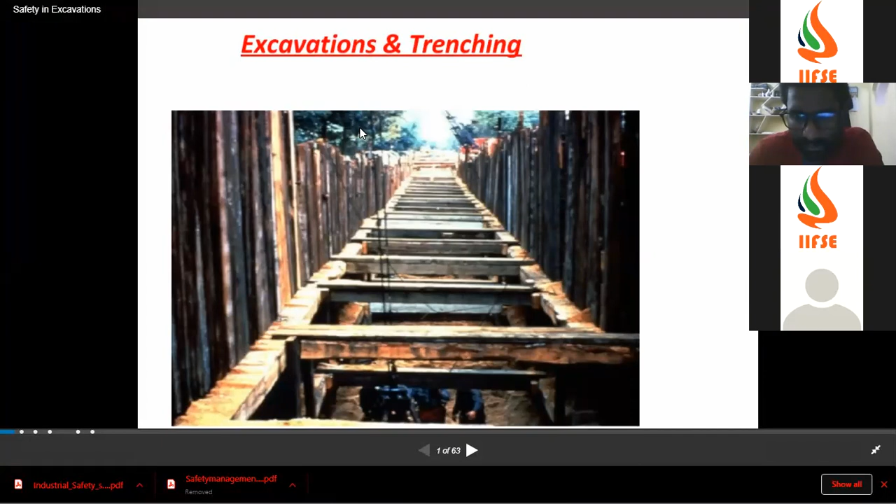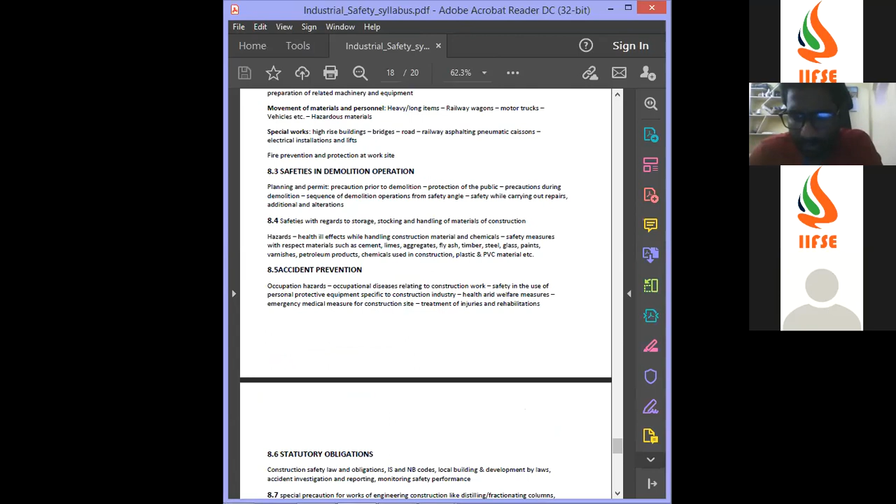The syllabus map. Is the syllabus paper visible? You can see the syllabus paper, right? Everyone? This is the syllabus. Yes, sir, it is visible.

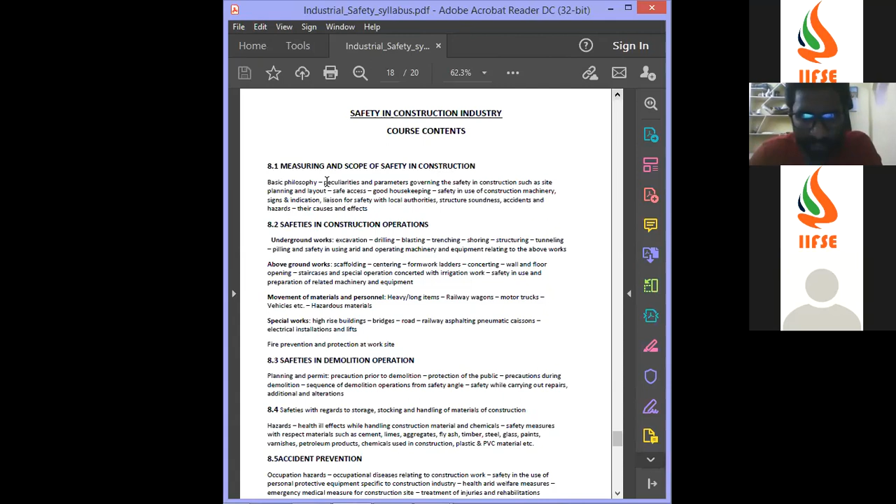So here we have measuring scope and safety in construction, basic philosophy, peculiarities and parameters governing safety in construction site, and safe access, housekeeping. These are the measuring and scope of this, which is the introduction part actually.

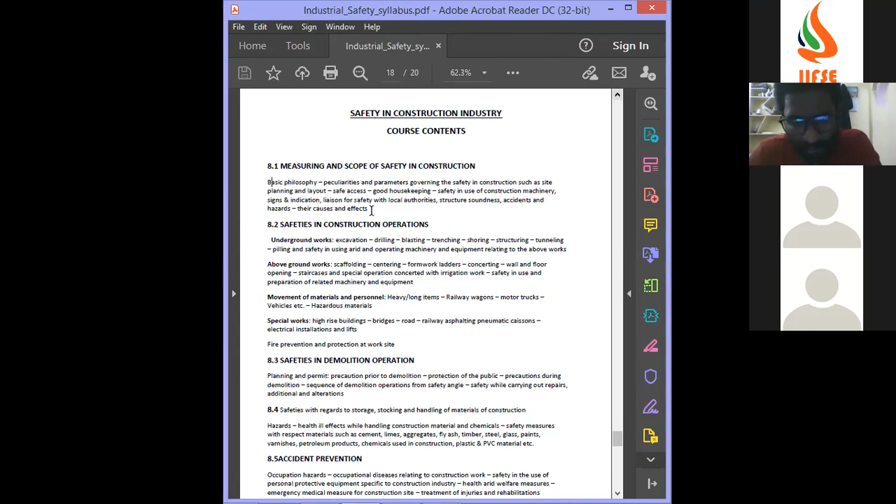From here the core concepts get started. Safety in construction operations. Underground work - what do you mean by underground work? Excavation, drilling, blasting, trenching, shoring, structuring - everything comes under underground work.

Normally here, for your information, I would like to add a few points. There is underground work, above ground work. Actually, there are two other more construction safety related works, which is above water and underwater. This is underground and above ground, and we also have construction safety above water and underwater.

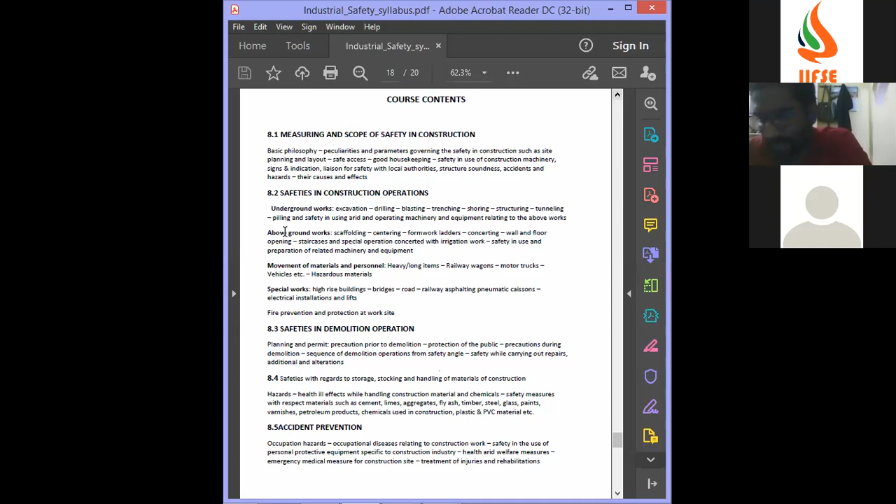If you read the Regional Labor Institute or Central Labor Institute books, I remember reading many years back that they mention underwater and above water works also. All these also come under construction - above water construction, underwater construction.

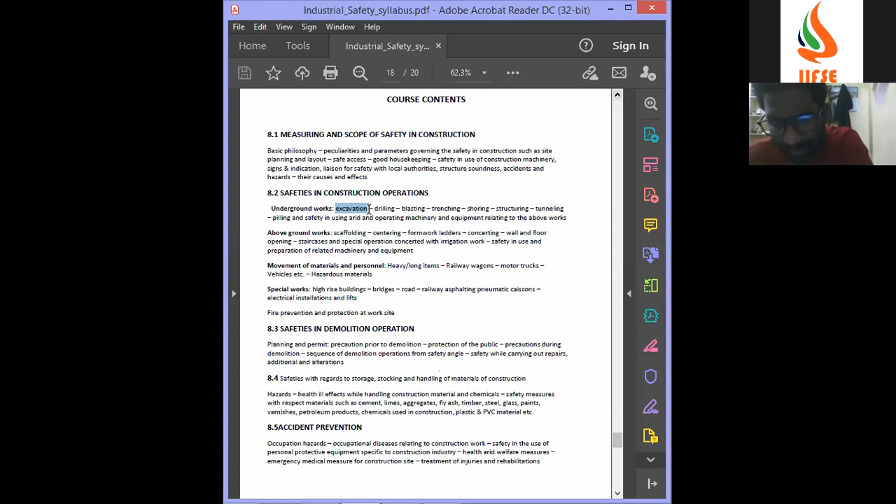Coming to above ground construction - scaffolding, centering, formwork, ladders - we'll discuss what are the above ground constructions. For everything we'll have hazards, consequences, and control measures. Your main principle is to understand what is the hazard in excavation, what are the control measures - you have to relate it that way. Today we'll go to discuss all this.

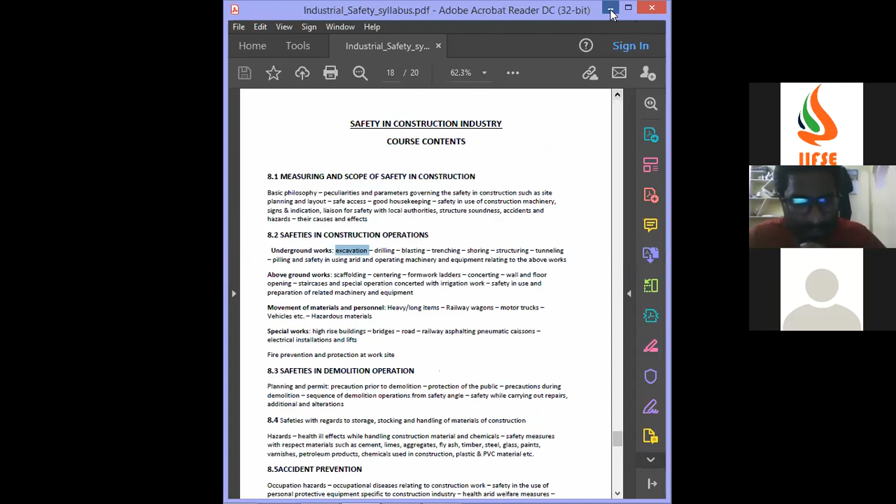So now you can able to see the excavation and trenching slide, can you see? No sir... just wait... now we can see, right? Now it's okay, right?

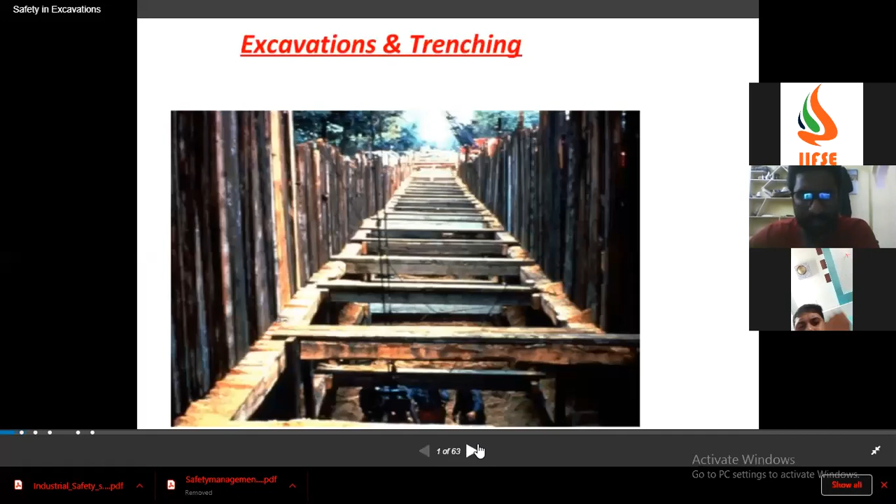So here, excavation and trenching. I would like to go in a very systematic way. No need to rush, because this is the 108 paper. Today's class covers most of the topics.

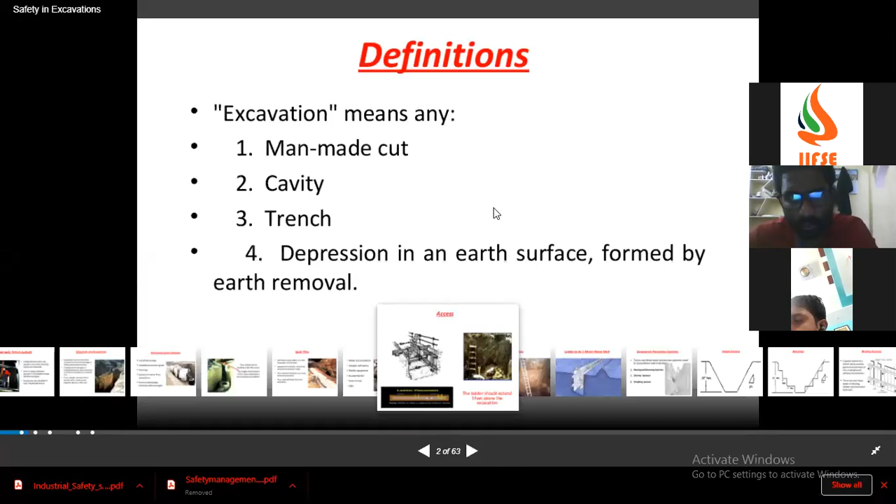Coming to the definitions - excavation means any man-made cut, cavity, trench, or depression in an earth surface formed by earth removal. Man-made cut, cavity means a small gap, trench can be 2 feet, 3 feet, or any depression on an earth surface formed by earth removal.

Normally they say that if an excavation is more than 3 feet or 1 meter in depth, only that comes under excavation. But the word itself says any depression in an earth surface - like if we do a small digging with our hand, it also comes under excavation.

Coming to industrial practice, excavation can happen with excavators, bulldozers, foundation digging equipment, or poclains - different machines which do the excavation. So basic definition is excavation means any man-made cut, cavity, trench, or depression in an earth surface formed by earth removal.

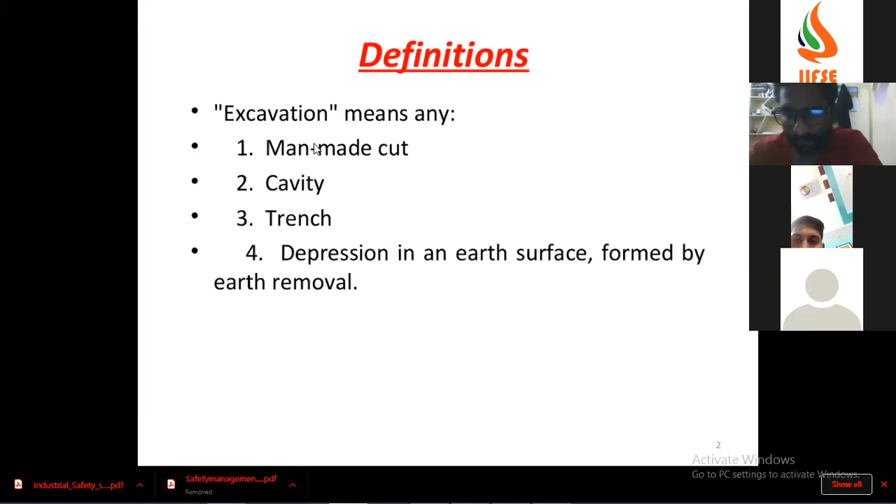Okay, so this is the basic concept of confined space. Why has confined space come up here? Because it is a part of construction safety, and in construction safety a lot of confined space work will be going on. So what do you mean by confined space?

Confined space is a space that by design has limited opening for entry and exit. Limited opening means it will be very small, it cannot be large. There is only one exit and one entry, one opening.

Fine. And we cannot just conclude it in that way. It depends - if it's a boiler or a tanker, it's different.

For example, our trailer petroleum tanks, petroleum boilers, or in oil and gas you'll have different kinds of tanks. Sometimes the same entry is the same exit. Okay, that is also confined space.

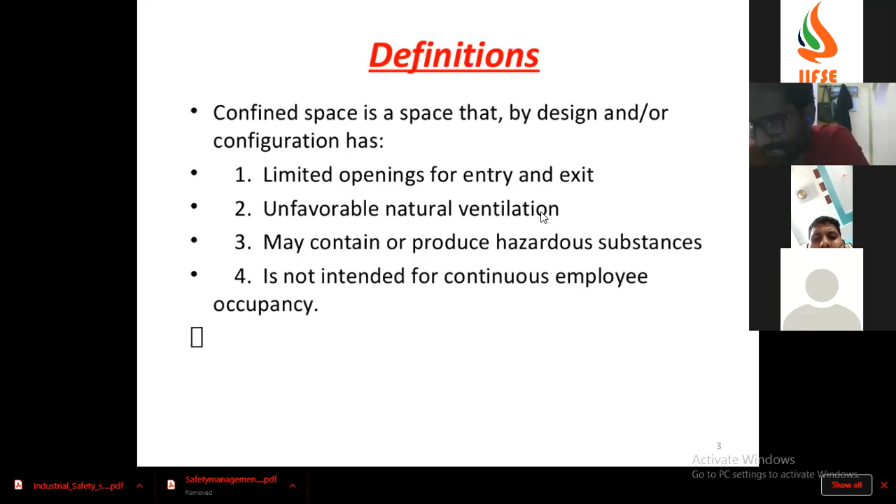Okay, so occupancy means no one should go and occupy that area - like we should not go stand, have a chat, or have a conversation. This should not happen in confined spaces.

So if anyone asks you in an interview, people who are new to the topic, what will you say - confined space is a space that has limited opening for entry and exit, no natural ventilation, gases are present, chances of hazard are there. Okay, so coming to objectives.

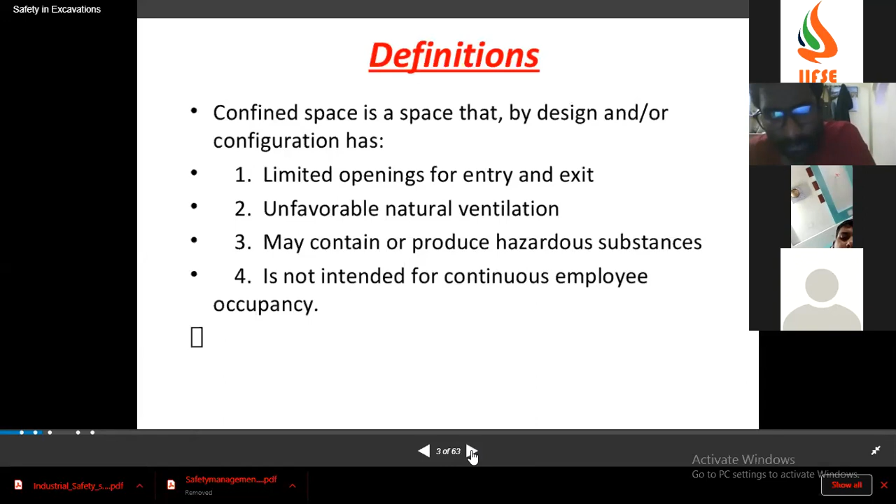Sir, in this confined space there are a lot of requirements - are there mandatory requirements? Actually these come under precautionary measures. Do you know about H2S inside the tanks and vessels?

Before going into confined space measures - yes sir, please tell me sir. Hello, can you hear me? Sir, there is some toxic gas in there. Sir, we are not able to hear your voice, your voice is getting broken. Sir, the server is very low, that's why.

No problem. Actually what you have asked is, before going into the confined space, based on the precautionary measures, the first thing to do is have a multi-gas detector and test the gases. Okay, that is the first primary thing to do, and we will talk about this when we discuss the precautionary measures.

What are the hazards in confined space, sir? Every confined space crew must be trained properly about confined space. Sir, we are not able to hear your voice. I'll continue the class, we'll discuss this.

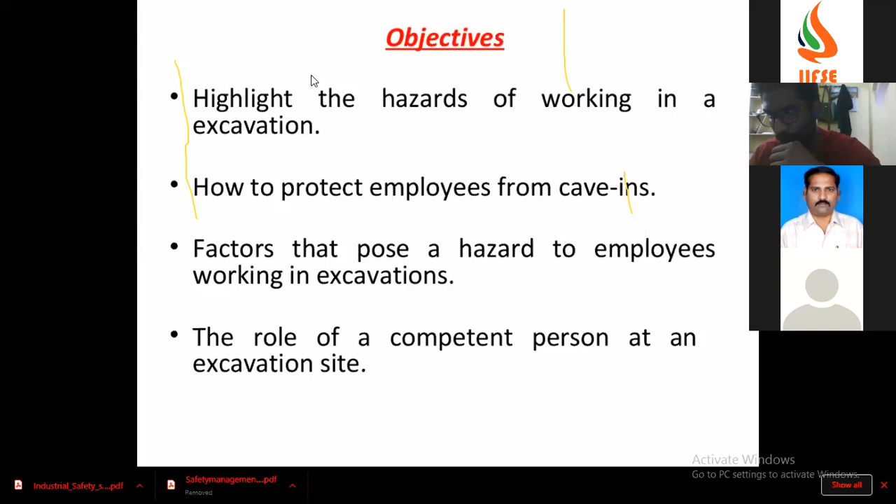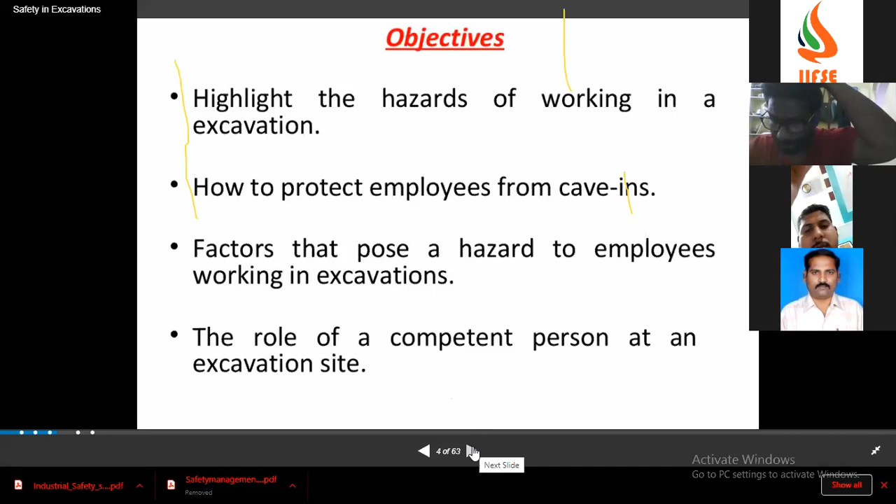We have to see, first, the employee must determine the estimated locations of utility installations. What do you mean by utilities? Like sewers, electrical cables, water lines, gas pipelines - all come under utility.

Telephone lines too. We have scenarios where gas pipelines got ruptured due to excavation because of improper clearances. If excavation work is going on, as a safety officer the first thing you'll ask is whether there is anything going underneath. For example, if you want to drill a hole on a wall in an industry or factory, you'll first ask whether there are any power lines running inside the wall. That is a basic thing one should ask.

We will done, sir, electrical survey, underground survey. Yes, underground survey should be done.

The yard layout should be asked from the government. I think someone is drawing lines. I don't want that to happen, please. Someone is drawing lines, I don't know why the lines are coming on my laptop.

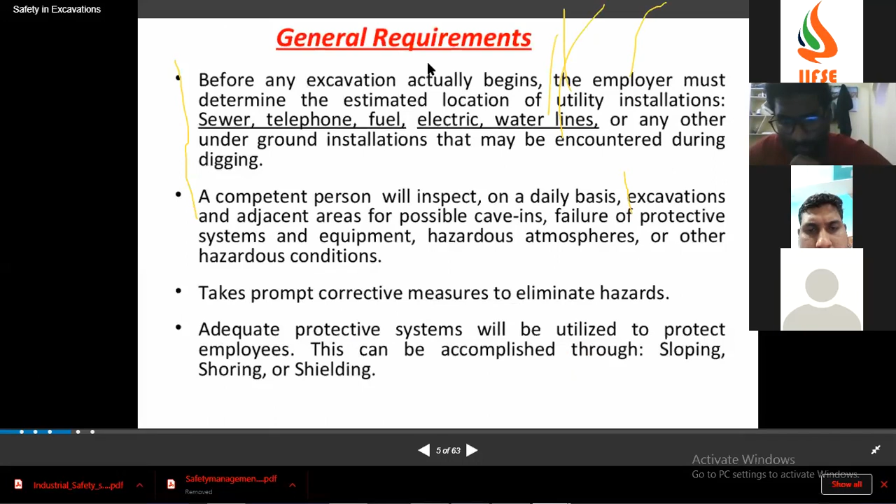Because he will check the shoring supports, benching supports. Yes, we have to check on a daily basis, because if tonight there is some excavation happening, tomorrow morning the entire situation will change. So on a daily basis, on every shift, what are the possible points he should see?

The cave-ins - collapse, sir, is there any possibility the excavation may collapse? Yes, is there any possibility of cave-in? Second, underground water may come around. Yes, I'll come to that - that's also a point.

If underground water comes out when you did not determine the utilities before digging - okay, here's the second point.

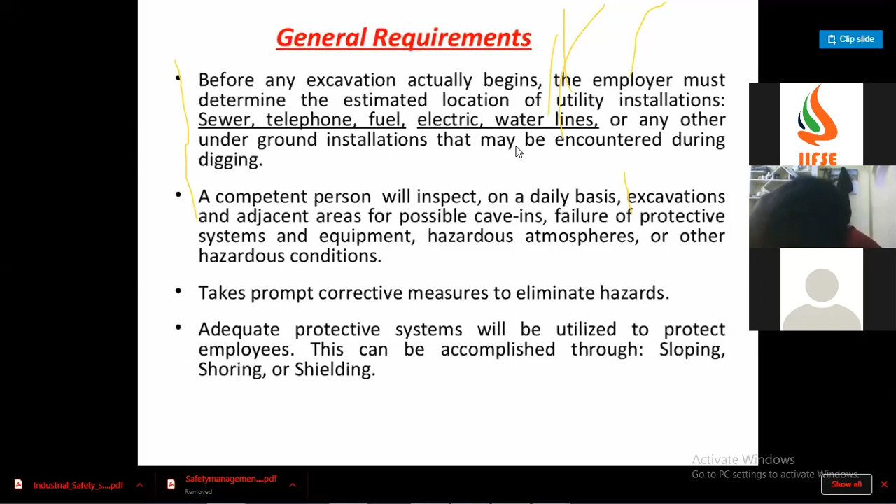Before starting the excavation, sir, tell me. Hello, yes I can hear you. Actually you're not able - you're in the area, we are not able to hear you sir. You're in bad network, I don't know. Network is here. Okay sir, okay, fine.

So adjacent areas, cave-ins, failure of protective systems or equipment, hazardous atmosphere, or other hazardous conditions. I'll be discussing the general requirements. A personnel should assess whether there is a possibility of cave-in, meaning is there any equipment or load on the edges of the excavated area?

Listen carefully - failure of protective systems and equipment. What do you mean by that? If there are no wedges, or they are placed in unsafe locations, placed on a slope, or not fitted with outriggers, all of that comes under failure in protection systems.

Hazardous atmosphere - if he's going inside and leaves the gas cylinder there, the atmosphere may change. Every shift, the atmosphere check should be done by a multi-gas detector.

Take prompt corrective measures to eliminate hazards - the corrective measures we have to take, we will see in the further PPT. Adequate protective systems will be utilized to protect employees. This can be accomplished through sloping, shoring, and shielding.

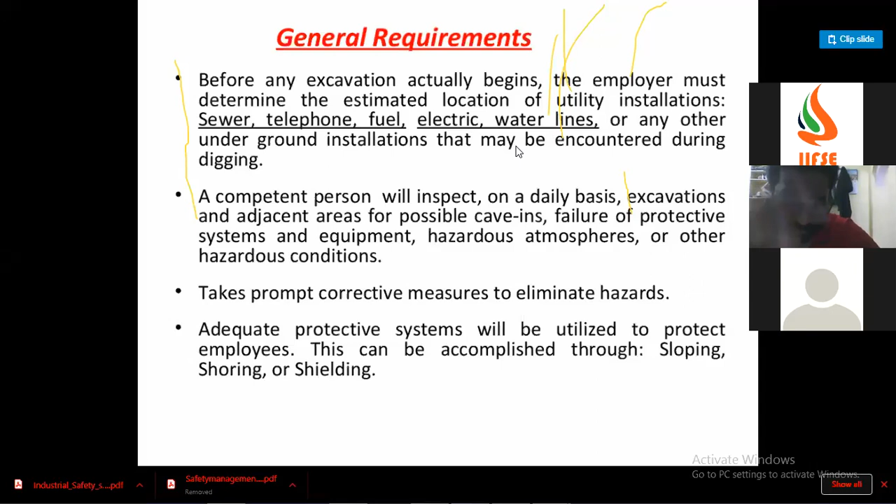This is sloping. Shoring means if this is a trench, keeping some adjacent blocks, woods, and keeping some rods in between the woods, it can be pneumatic, I'll be showing the pictorial way, that is shoring. Shielding means keeping a box, I'll be showing that.

This comes under PPE, which should be worn. Employee should not travel more than 25 feet to reach the stairways. Okay, these are the basic things.

For 4 feet and more trenches, toxic and hazardous atmosphere will be tested daily. Mechanical excavators and power tools should not be used within 0.5 half meter.

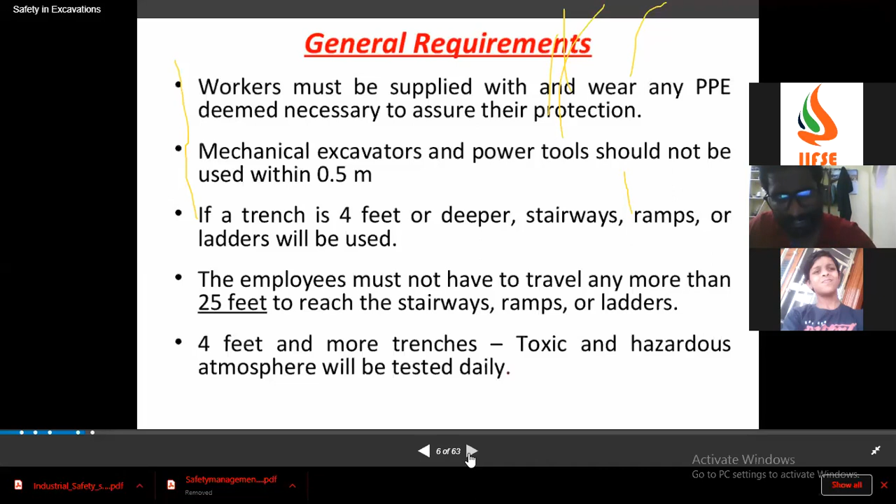Should not be used within half meter, because half meter means if you are digging a half meter excavation, you need not use this mechanical excavator, or you can dig by hand. Okay, fine, these are the basic definitions. I would like everyone to understand this.

Sir, even for excavation, we should do gas testing. Sir, if excavation is done more than 4 feet, or if it is in a closed warehouse or environment, we have to do it. If it is in an open area, there is no need. If the excavation is such that it takes a turn after going deep, you cannot see the person.

For example, sir, if in excavating, after some excavation, you will keep a big pipe, and the person should go inside the pipe and do a weld at the bottom. Sorry for the interruption, sir, can you listen to me?

Sir, if you're working in a brownfield or somewhere, even for half meter or 2 meters, it's not a matter. Before starting the activity, we need to go for a gas test based on the permit and based on the requirements. We judge the situation based on the environment and the permit requirements, based on the policy. If they are working near a gas plant, they have to do gas testing. If it is a hazardous or brownfield area, it's mandatory.

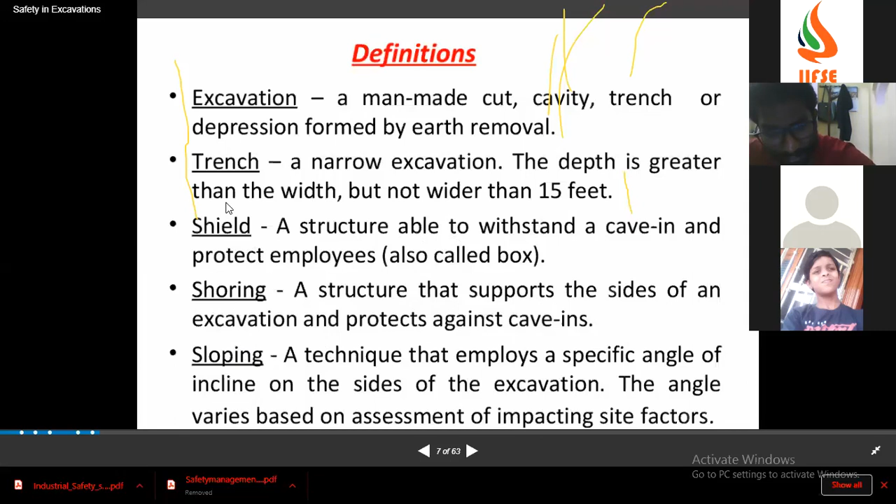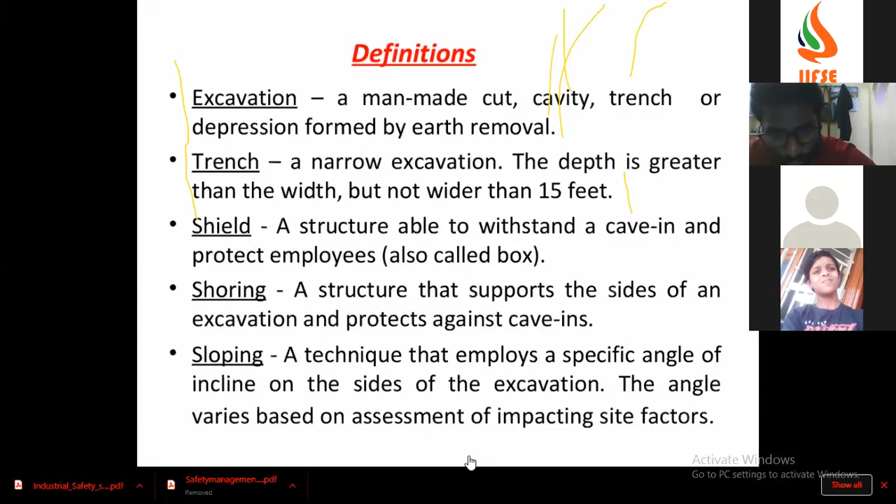Shielding, shoring, and sloping are the precautionary measures, and they are the control measures to protect the side walls from collapsing. Okay, I would like to show the pictures, just wait.

This is a cave-in, perhaps the most feared trench hazard. What are the potential fatal hazards that exist? Asphyxiation due to lack of oxygen in a confined space. If the cave-in phenomenon happens, the person dies from suffocation. Inhalation of toxic fumes, drowning.

Why does drowning come here? Because there may be a flood. Why would a flood come? If a tunnel work is going on beside a lake or sea area, they make sure there is a certain distance maintained.

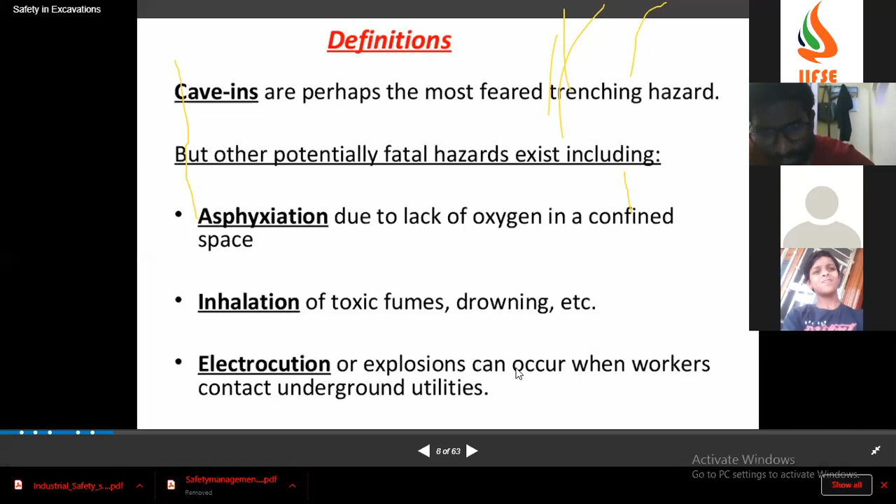Electrocution can occur when there is underground utilities and the excavation is done without proper clearances. See, what is this?

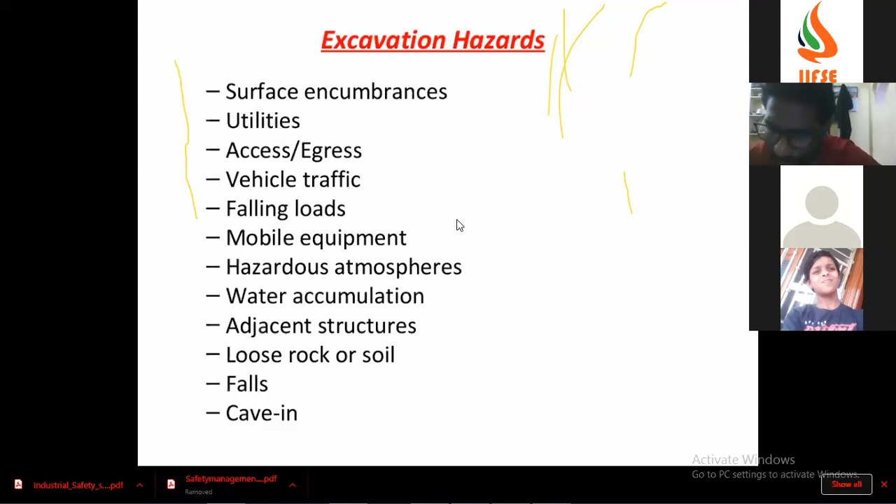Utilities - so what is the main hazard? Utilities means underground cables or anything - cables, water pipes, electrical cables, gas lines. Access and egress is also a hazard. Vehicles, traffic, falling loads, mobile equipment. Loads may fall, mobile equipment which are passing by the excavation areas. Hazardous atmosphere, water accumulation.

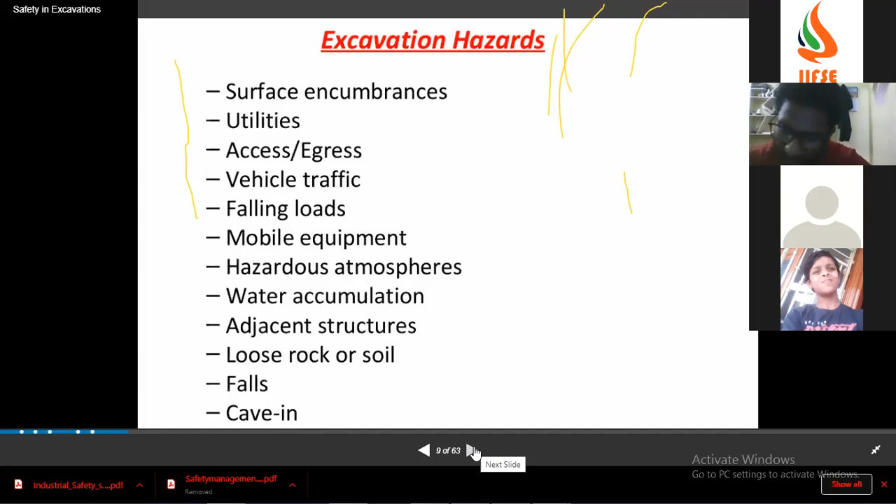This is the surface work.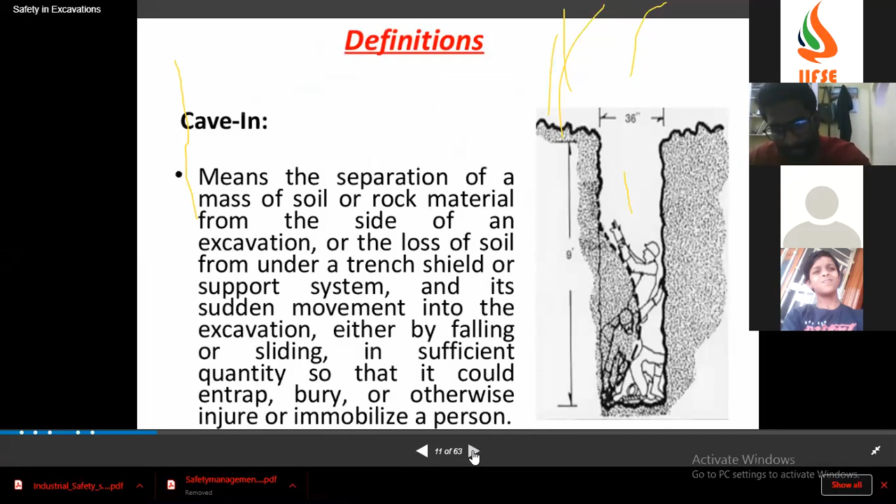So this is the anatomy of cave-in. A cave-in happens only when the adjacent sides have pressure. So what are the precautions to be followed?

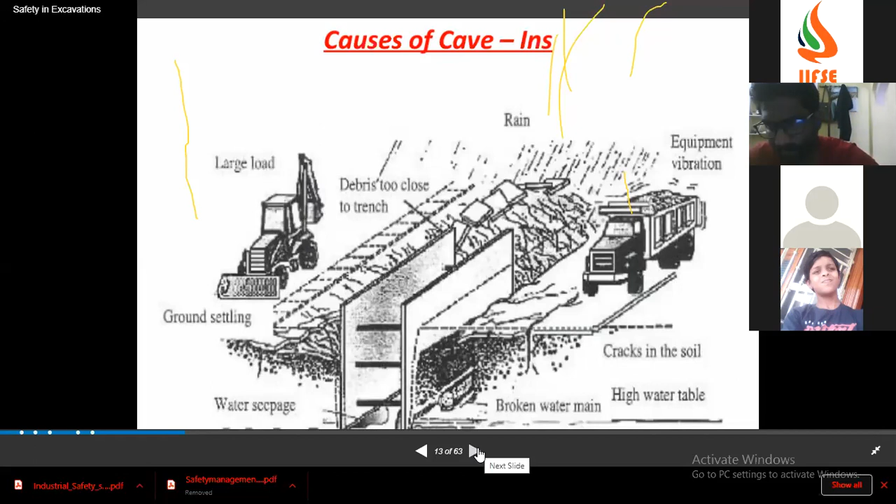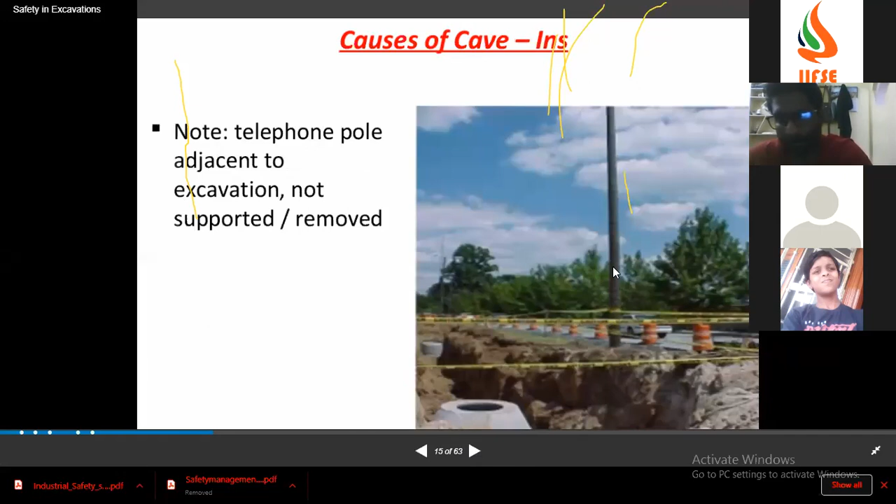So this is the excavation which is not proper. There is no proper method followed. See, this is also a telephone pole adjacent to excavation, not supported. This is very dangerous. It may fall, lose its strength.

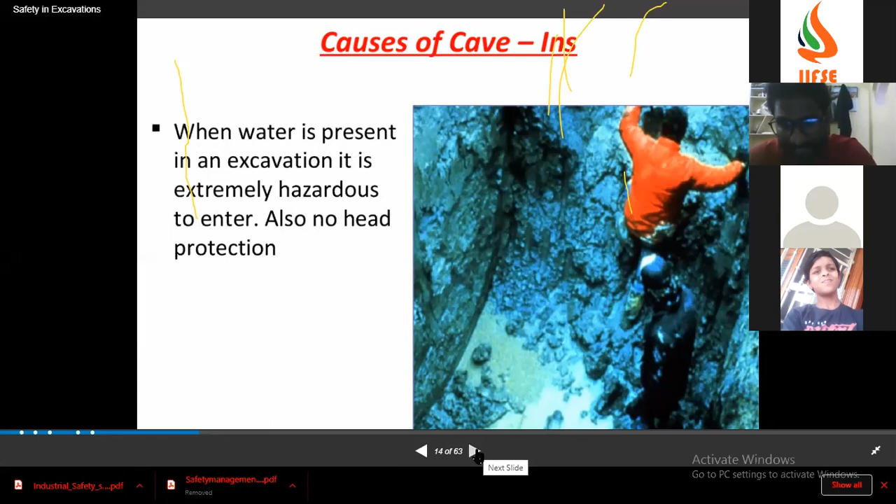Here what is saying, water is present, extremely hazardous. Why is it extremely hazardous? Because the surface walls may collapse, right? The surface walls may collapse, adjacent walls may collapse. Here the telephone pole, this is also cave in.

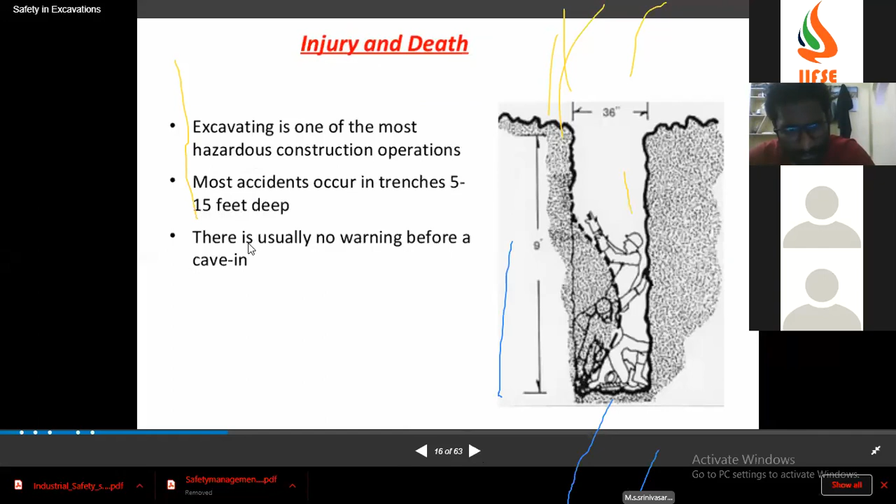See, most accidents occur in trenches 5 to 15 feet deep, right? There's usually no warning before a cave in. See, this is the system to resist it, this is the shoring technique.

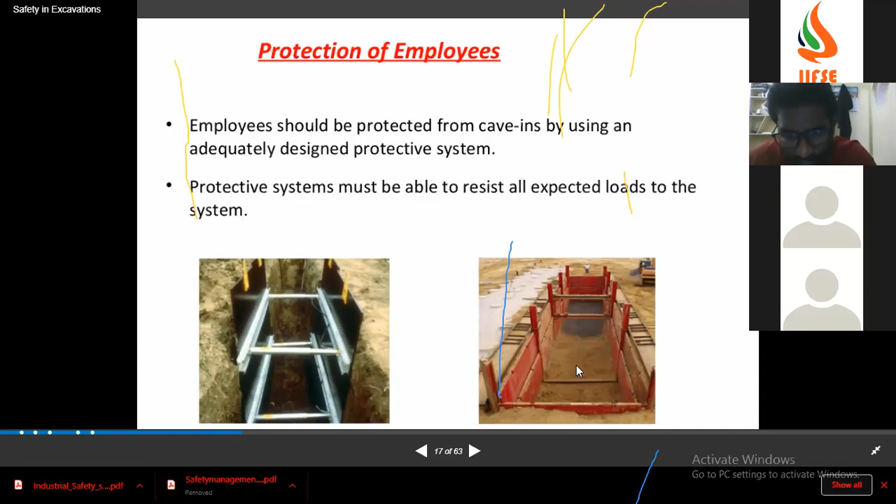See, this is trench, this is called shielding. This is called trench box, advanced, this is called shielding. See, they have made a 45 degrees minimum cut at the top, right?

See, if the degree of cut increases, the risk of sand falling or the pressure on the sides will be decreased. In our olden days they used to have sloping and benching. Sloping means they used to cut a side cut, but sloping and benching involves a lot of manpower and also waste of time. That's the reason these techniques came about, like the trench box or shielding.

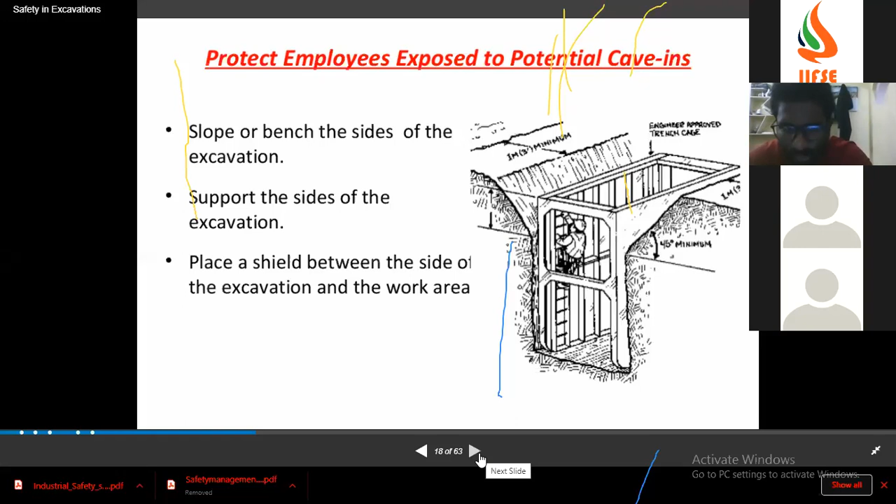So a well-designed protective system - I just want to clarify and correct one thing. This is not like olden days; we have to consider what is the length of the excavation. If the length of the excavation is like around kilometers, then they do sloping.

For example, culverts, everything you can see sloping, right? You cannot see benching or trench box. If you are designing culverts, they'll do sloping, that's the best way, or in the reservoir part, the rivers which flow from the reservoir, they'll do sloping.

A well-designed protective system can design the sloping and benching systems, supporting systems, shielding systems, and other protective systems. They'll ask what are the requirements of the excavation system. Depending upon the design, you have to plan - you can do sloping, shielding, appropriate handling of materials and equipment.

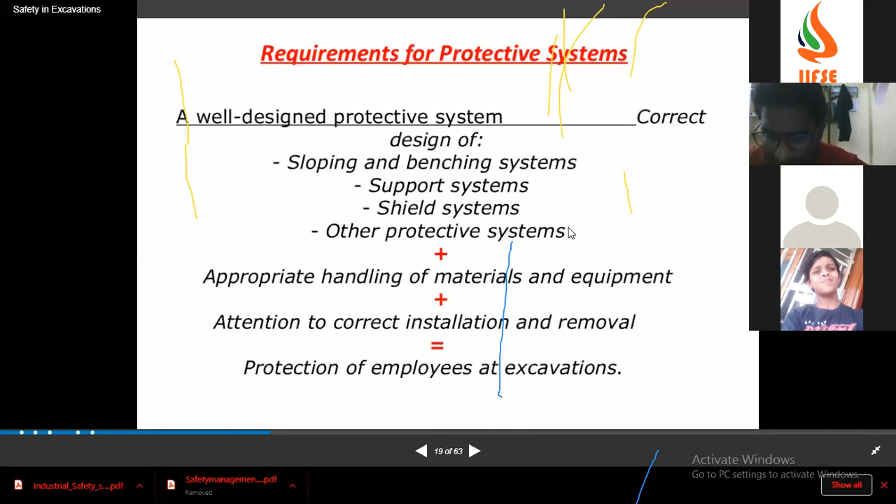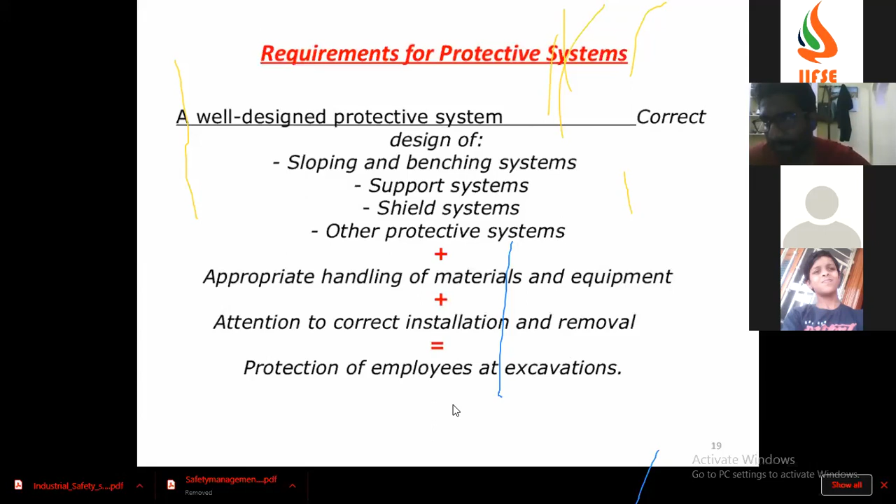This is the basic concept slide: after shoring, sloping, and shielding, there are other protective systems. What do you mean by other protective systems? Like placing wood to avoid vehicles coming near the edges, keeping the debris 3 feet away - all comes under protective barrication, sir - barrication, signages, speakers, all come under protective systems.

Sir, this depends on the classification of soil, na sir - shielding, shoring - yes, classification of soil. Depending upon the classification of soil, also you will have shoring, benching techniques. If the soil is only loose, very loose soil - yes, if the soil is very loose, they will use trench box.

They don't use sir, compromise - slope. Like sandy soil, sir - yes, sandy soil, sandy soil they will use sloping. Not sandy - no, sandy soil they will not. If the soil is very loose, they'll use trench box. If it is like sandy soil, they'll use trench box depending on - if you want to make a slope, you have to have some consistent soil.